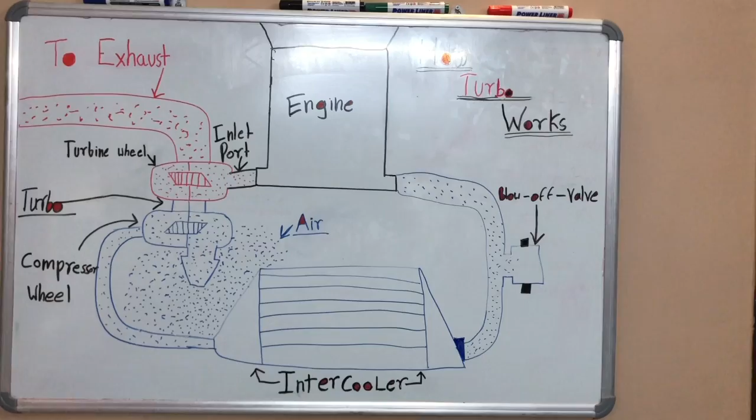So today we're going to be taking a look at how a turbo works. A turbo is basically an air compressor. There's also other forms of air compressors in many automobiles, such as a supercharger, but in this case we're going to be taking a look at how a turbo works.

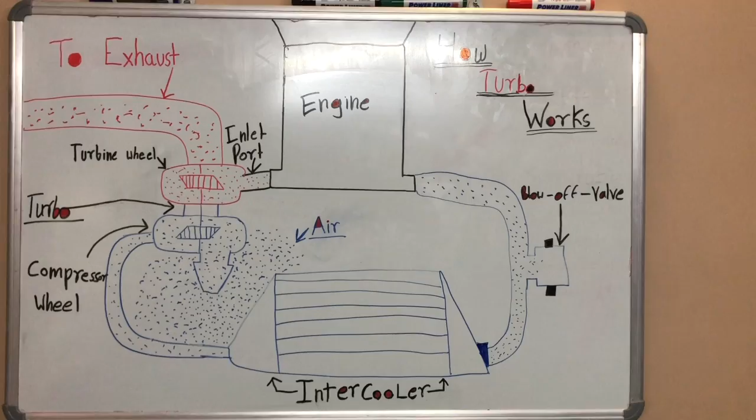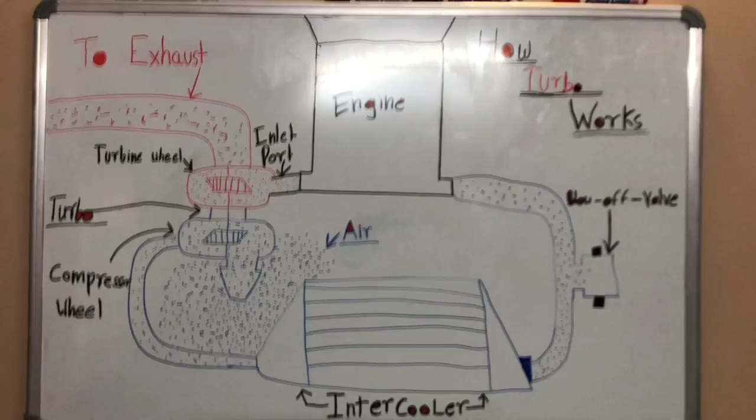A turbo can be used in many automobiles, such as cars, planes, etc. For example, we'll take a look at planes. Normally at sea level, let's say your plane has about 400 horsepower, but at about 30,000 feet, or about the altitude of Mount Everest, you'll have about 265 horsepower. So the horsepower reduces because the air at that altitude is way thinner. To restore the air pressure, we use a turbo or a supercharger. In this case, we're using a turbo.

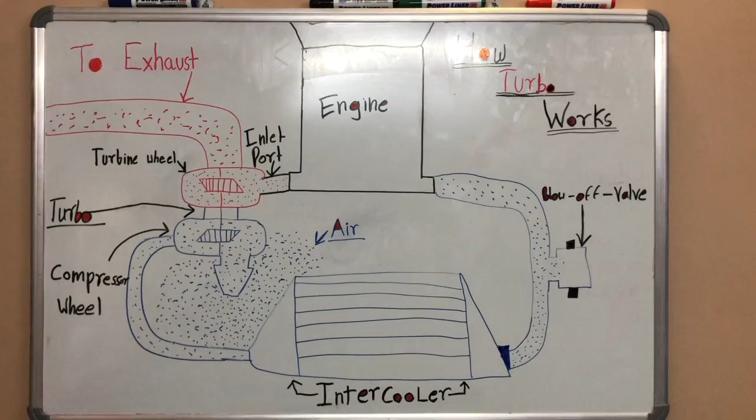The way a turbo works is it uses the exhaust air that would normally be wasted if you didn't have a turbocharged engine to spin a turbine wheel. The turbine wheel is connected to a shaft, and that shaft is also connected to a compressor wheel.

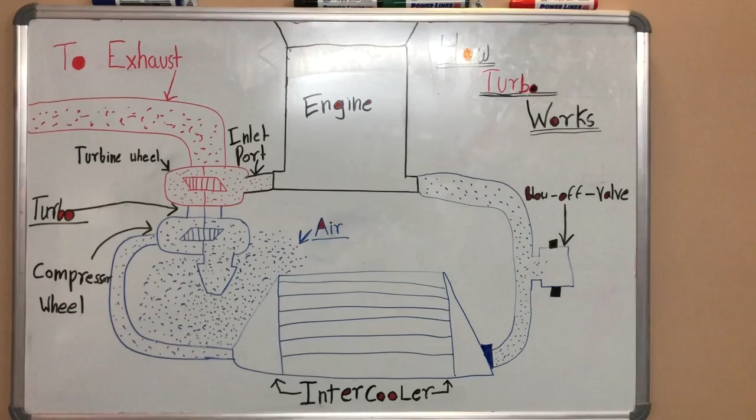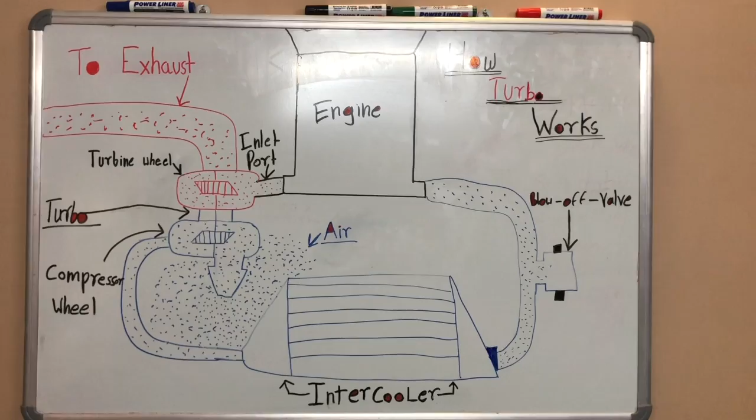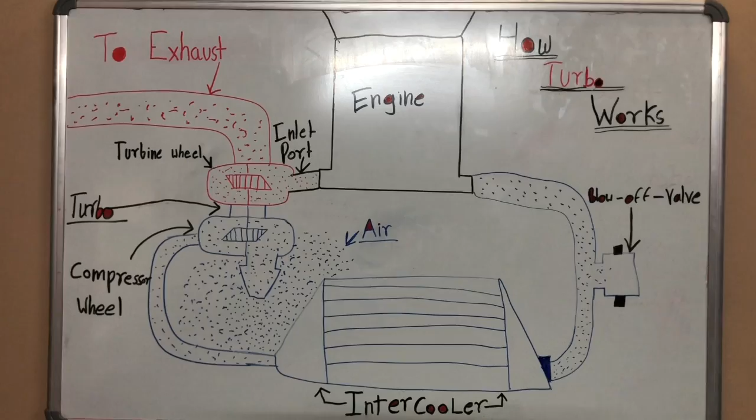Now the compressor wheel will spin and it will suck in all the air and compress it. As you compress the air, it gets super hot because there's so much friction going on between those molecules. So as the air gets hotter, you want to have something that cools down the air. An inlet shoots it out and gives it to an intercooler. That intercooler has cooling fins and it will cool down the air. This creates cooler air that can be entered into the engine.

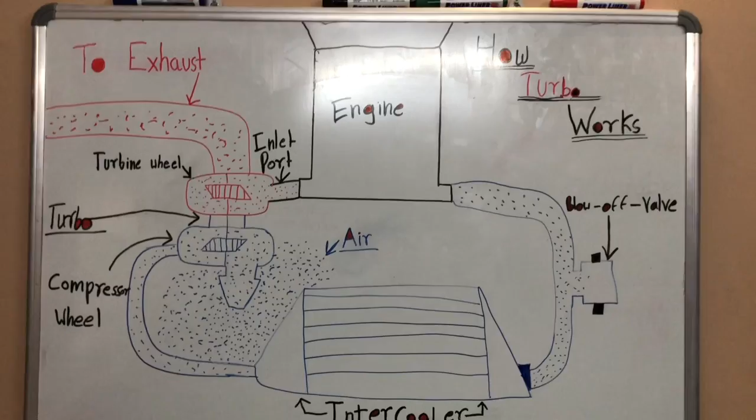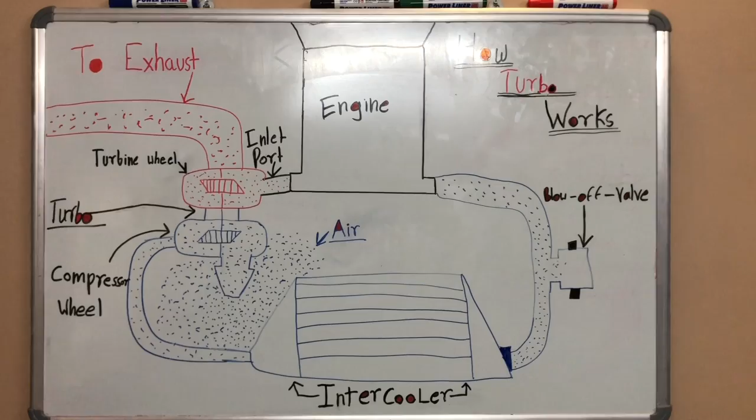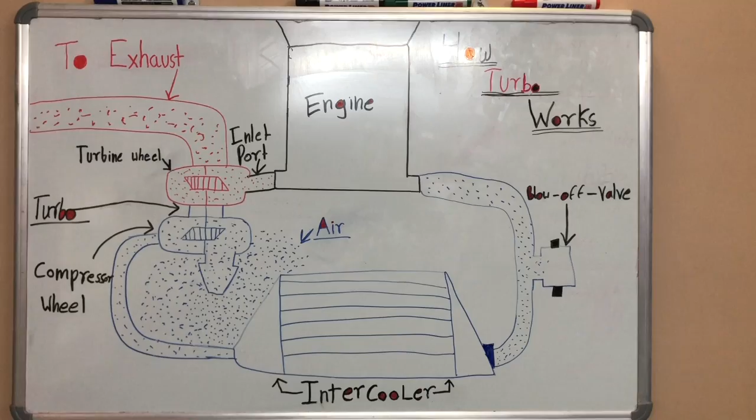Now since this is happening, the engine can produce higher horsepower. So say the driver lifts off the throttle, or doesn't give any throttle input, you don't want the air to be rushing back into the turbo. So what engineers added is a blow-off valve on the far right side. This blow-off valve will basically let off all the air pressure that's inside the mechanism, so it doesn't rush back into the compressor wheel. So that's how a turbo works in a basic form.